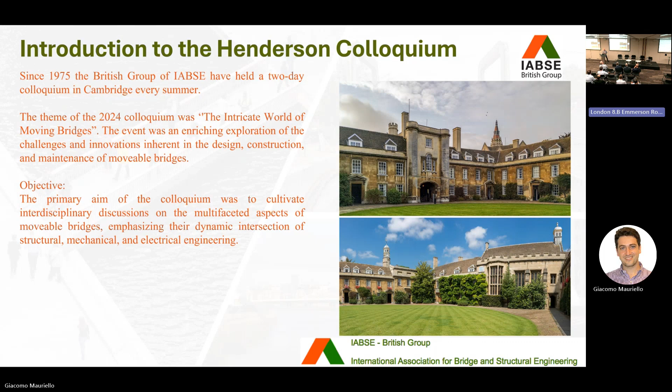So for those of you who don't know, and this actually was my first colloquium, they're held every year around the same time of the year. And they discuss the issues of the day in engineering. And we decided to look at this year the so-called intricate world of moving bridges. An exploration of the interdisciplinary nature, the very complex structures that involve design interdiscipline coordination, but also coordination with clients and usually with architects and certainly with constructors. So we wanted to cultivate this interdisciplinary discussion and look at a way to improve the practice in the United States and in the UK, and perhaps even potentially bringing it together.

And so, as I said, it's an interdisciplinary design world that we're in. So we wanted to look at those and break those down, the structural, mechanical, electrical coordination, and how to bring all of those disciplines together to get a coordinated structure. And as I said, temperature movements are important to understand, and Simon will be talking about that in detail as we go on through this presentation. Early contractor involvement and supplier involvement. A lot of the elements that go into these structures are off the shelf or have to be custom fabricated, and so getting that kind of advice from contractors is important. Of course, in the world that we're in today, sustainable practice needs to and ought to be accommodated within our designs, and we talked about that.

There was one presentation about the pros and cons of counterweighting a structure, right? The real heavy brute force perspective from a structural perspective, or non-counterweighted and moving that force into the machinery. There were attendees from the United States and from Britain and from Europe, all using different codes of practice. And there was a presentation on the comparison of those and juxtaposing those and looking at the pros and cons of those. We also need to talk about, skip to 7, the marine traffic and the involvement of the clients and the owners, the port authorities and the marine industry, and how to manage construction around the constraints.

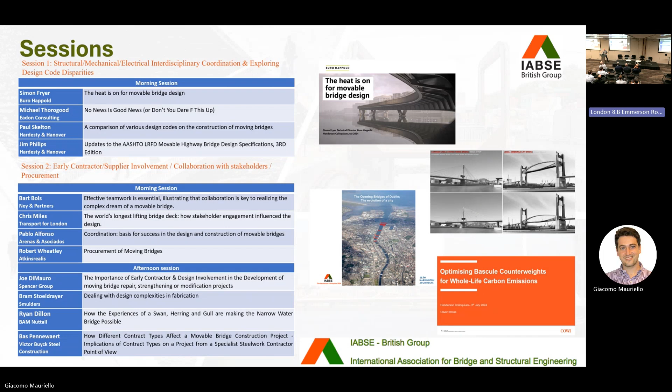And we'll talk a little bit later about how we can move that forward, taking those relationships and moving those forwards into an organized fashion to help further the practice. So there were 2 days worth of sessions. We arrived on a Monday night. There was a full day of sessions on Tuesday morning and afternoon, and then a morning session the next day on the Wednesday, and then a wrap-up session. And again, we'll have 3 of those sessions today with our attendees over here. I think that's more or less what I want to get to.

The panelists' assignment, as I said before, is talking about temperature. Ryan will talk about his experience working on the Northern Spire and the Great Yarmouth Third Crossing, or the so-called Herring Bridge, and the Gullwing Bridge, which maybe a lot of you know about, since Arup was involved in that, and the Govan Partick bridges, and how those bridges came together to inform what he's currently doing. Really extraordinary presentation that was made there. And Ezra will talk about it from the perspective of the architect. So I think that's it for me.

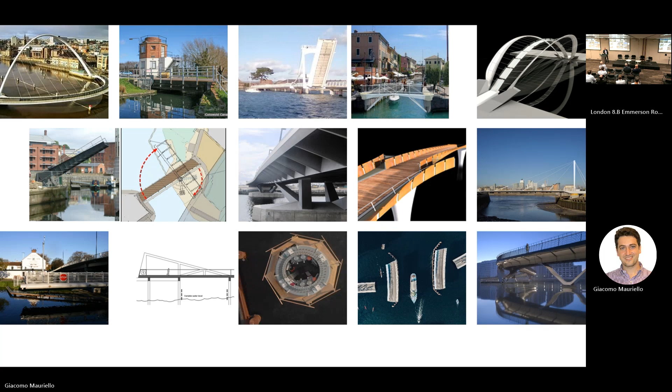So with that in mind, I want to explore the approach that is taken to these very unique designs. And I'm going to use the topic of temperature effects to illustrate that. But I'm not just confining my comments to that. It's just quite an important subject. And I think you'll see from the project examples that I give how we've needed to go a little bit beyond what the standards say in order to verify how these structures will work.

So I'll start by going into the temperature effects, illustrating that with reference to 2 case studies, projects that we've worked on, and then broaden out the discussion to designing from first principles and where perhaps the codes are not sufficient to give us all the tools that we need. And I'm hoping that at the end of the presentations, we can have a bit more of a discussion about this whole area.

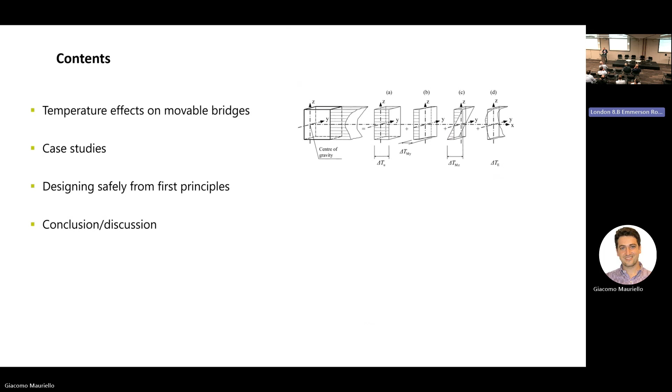So I don't think I need to labour too much on why temperature effects on movable bridges might be important. There's plenty of press coverage of problems that have occurred, stories of the fire brigade coming out to douse down a bridge that has jammed in position. It's very important that we try to predict the thermal effects on a movable bridge and make due allowance for that in its design.

However, when you look into the basis of the thermal sections of the codes of practice, the Eurocodes, going back before that, the British standards, you find that it's based on quite a narrow amount of research. Actually, the original rules were based on some research done by the TRRL, the two reports that fed into the British standards, and that seems to have been perpetuated ever since in subsequent codes. And so there's a bit of a lack of research data in order to predict the effects of temperature on bridge structures.

Now, with fixed bridges, that's obviously something that we would be interested in, but even more so with movable bridges, where we're not just trying to come up with a safe design, we're trying to predict how the structure is going to behave, and that's a little bit different. On the one hand, we want to make sure that joints are sized so that they won't jam, but equally, we don't want to be designing them so they're half a meter wide and they look awful. So we've got to try to get our predictions a bit more accurate.

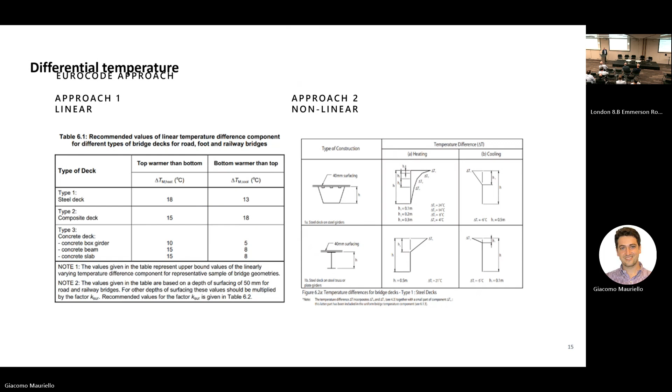So let's look at a couple of case studies. First bridge I want to consider is the Lille Langebro in Copenhagen. Some of you may know the structure. It's got a very complex geometry. Its main members are formed by doubly curved triangular box sections along each edge of the structure, which are exposed to the elements completely.

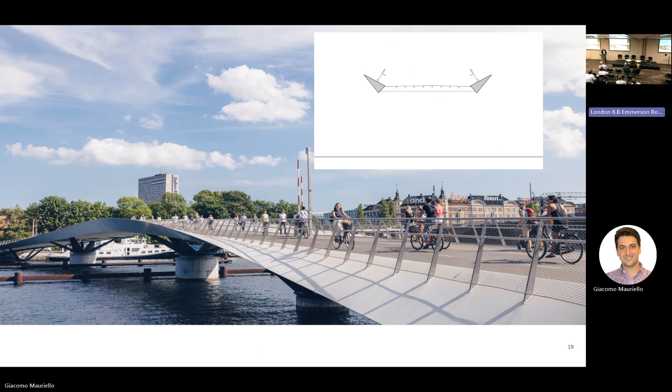This little animation shows the variation of the cross-section as you go from one end of the bridge to the other. And it's meant to replicate the flapping of the wings of a bird. Not only does it have that complication to its geometry, it also has plan curvature. So how do we predict the temperature effects on a bridge like this?

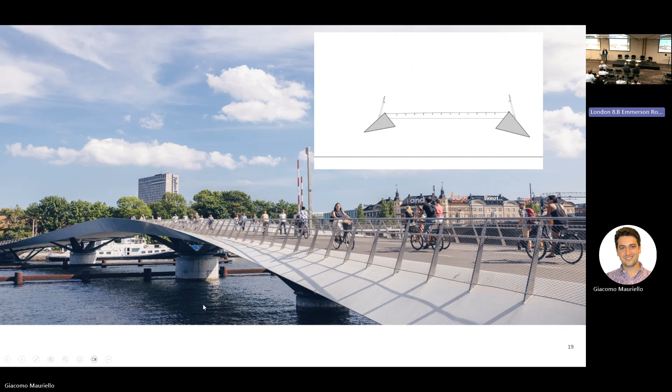How do we start a video?

Okay, this video is supposed to show how the bridge opens. The bridge is divided into four. The two central portions of the bridge rotate. One moves slightly before the other. And they come together with a joint which is obliquely cut across the bridge decks. So the point of showing this is just to emphasize the importance of accurately predicting the thermal effects on this structure.

Oh, there we go. All right, there we go. I'll know the next time. So there we go.

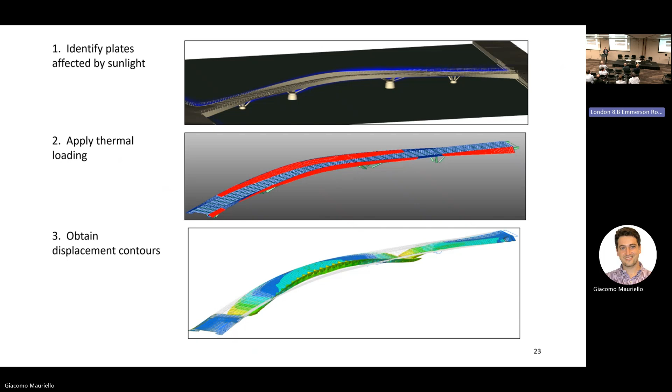And then we applied loading to the structure. I think it was a 12-degree temperature rise to plates that were affected by the sun at any given time. And you can see from the pattern of the sun loading that gave some very interesting effects on the structure. And this is the resultant movement ranges that were calculated at the joints.

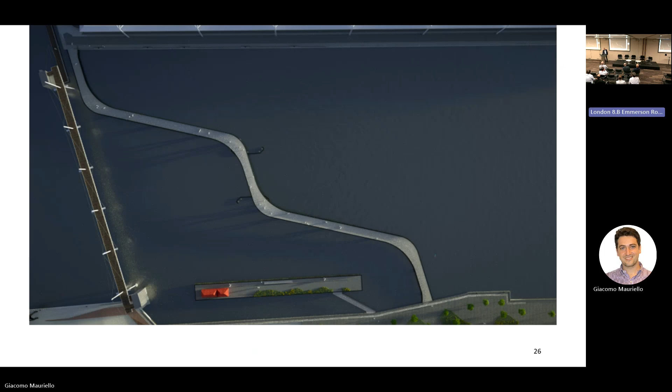So that bridge was constructed and has behaved well, but we now have another challenge. This is the Royal Victoria Dock Bridge at Silvertown, which again has a quite complicated geometry. It doesn't have the doubly curved twisted structural members, but it does have an interesting plan geometry. That's the nature of the structure itself. And this is how it opens.

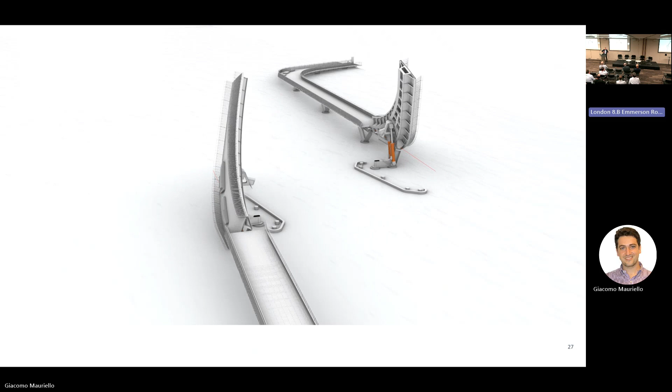So it's a double leaf bascule, but the two opening leaves are such that the outer radius is on opposite sides. So if you can imagine, the temperature effect tends to affect each of those leaves in the opposite direction, which gives some interesting concerns, potentially.

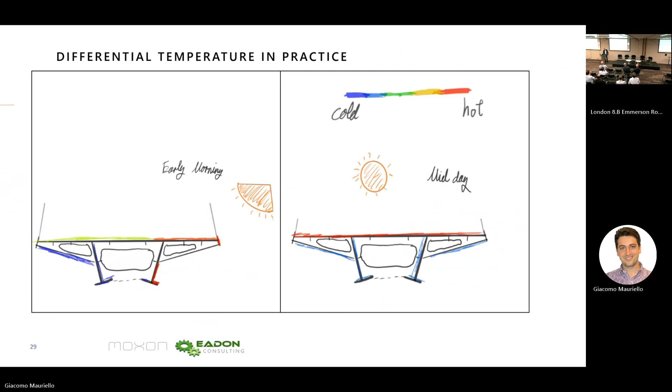So again, we wanted to be extra sure about the way that we predicted the thermal movements on this bridge. So we went one step beyond what we'd done with the Lille Langebro, and we used some clever software, some scripting, a plugin to Rhino called Ladybug, and weather data from the adjacent London City Airport.

And this time, rather than just applying a temperature rise to the plates affected by the sun, we actually looked at the irradiance that those plates experienced. And that can be related to the heat that they gain and therefore the temperature rise. And so it was a much more sophisticated bit of analysis; we were taking account of the time that each of the plates was heated.

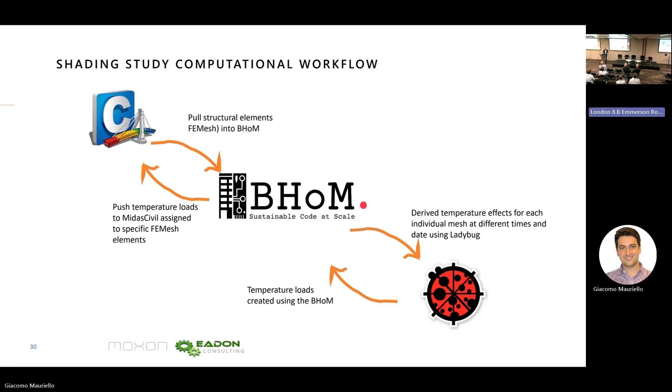So again, this bridge runs north-south, and so a similar sort of sun path to the other bridge. And you can see how that can be put into an analysis model, and we can get an envelope of all the movements. So it's a bit of a brute force way of doing it by computational power, basically, but it's a possibility that's open to us now, whereas it wouldn't have been in the past.

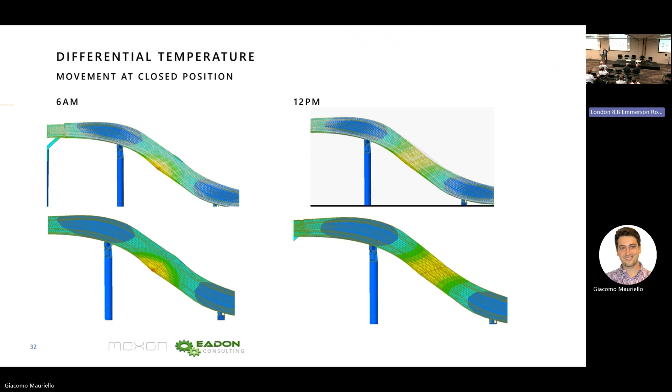And this is all in addition to doing the codified checks, by the way. So we don't ignore the code. We do the code checks as well, but this is an additional check, which we deem to be sensible. These are longitudinal movements at the joints that have been calculated.

When the opening leaves come together, there are pins that lock them. But if the bridge is just closed, then obviously there's a possibility for misalignment, and those pins need to be designed to cater for that misalignment. So that's another factor to be considered.

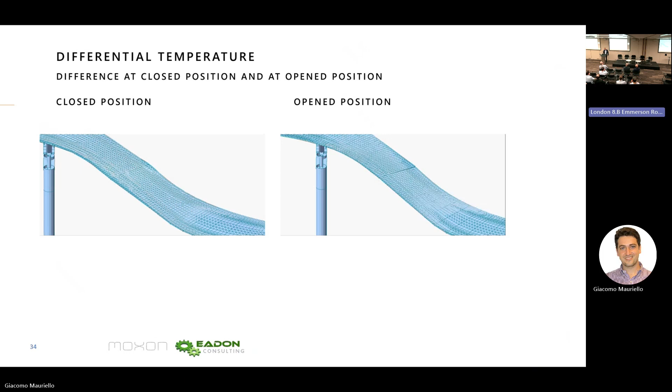Okay, so hopefully you can see the sort of thing that we've got into to try to think outside of just what's in the codes when we're designing these structures. So I've started with a blank sheet of paper here. And I'd like to just make the point that although the codes and standards are not there to be ignored, they only go so far. There isn't a standard which relates specifically to a lot of these structures. In fact, we know that the codes and standards which relate to movable bridges in general potentially need to be bolstered a bit.

So we now have this computational power, and personally, I'm not an expert in this at all, but we do have some very, very clever people who are able to write scripts, and we can just look at every conceivable possibility and envelope the whole lot, and then just gain the confidence that we've done that process, and we're not trying to second guess exactly how these structures are going to behave.

So I've given the example of temperature, but there could be other things that we might think about. I mean, maybe probabilistic design of loading patterns and so on could be something that we look into, and that might lead to savings in terms of material use.

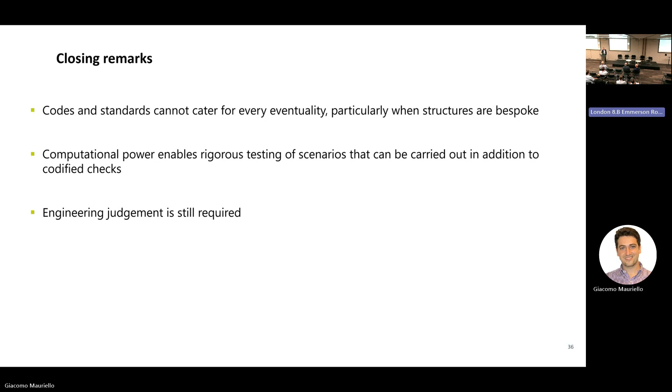And then the last point is actually, if you looked at the figures for what we designed for in terms of gaps on the Copenhagen Bridge, you will have seen that we didn't just work to 37.56 millimeters. We allow for construction tolerance, and there's always a need to be practical about these things and use some engineering judgment.

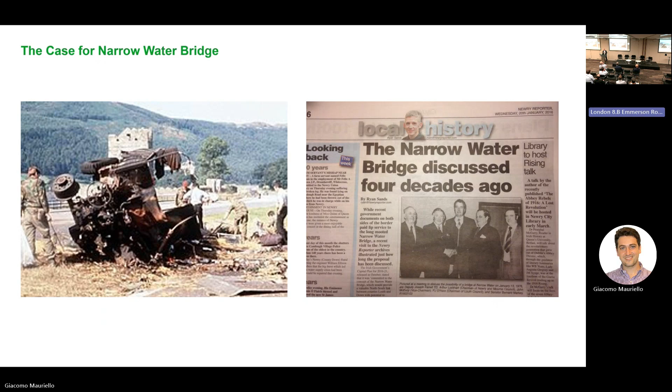It's also the site of the most significant loss of British soldiers' lives in the Troubles, where 18 were blown up, and this event stimulated discussion between civic leaders north and south of the border. We can do better. How can we come together? And 50 years later, and 25, well, maybe 30 now, after a peace process, and being a child of the peace process, it means a lot to be part of what Narrow Water's going to bring. So that's in the past.

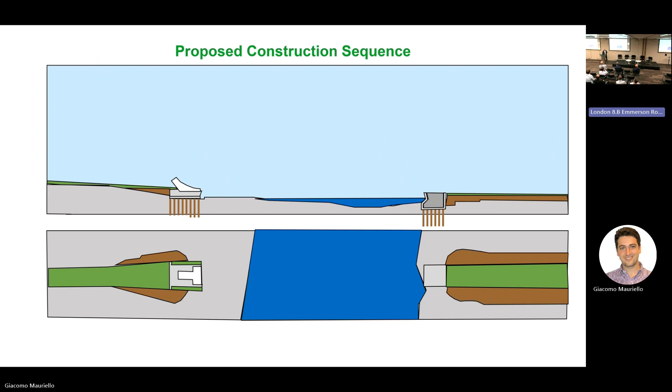Let's move on. Our proposed construction, as presented and consulted on, was what you would generally see: say, 200-ton sections prefabricated and spliced on site over temporary works, incrementally working out sequentially from our south abutment, and the same for the bascule span on the northern side.

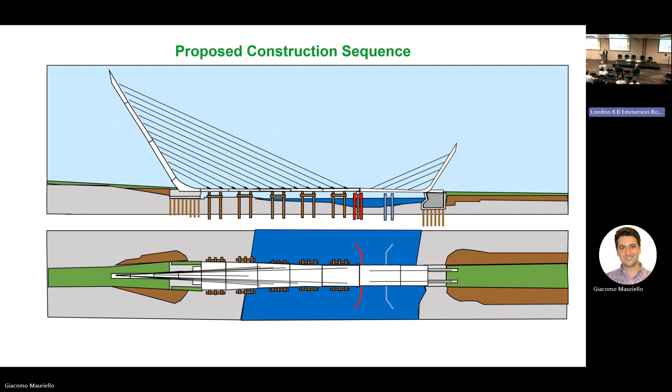Doable, but if we look at the past and the experiences of Mr. Calatrava, both in Seville and California, these structures are costly, they overrun, and they present quality issues, and they get done and they are beacons, but both of those schemes, while beautiful, overran on both budget and time, and the first thing we said is we're not doing that here. So in swims our swan.

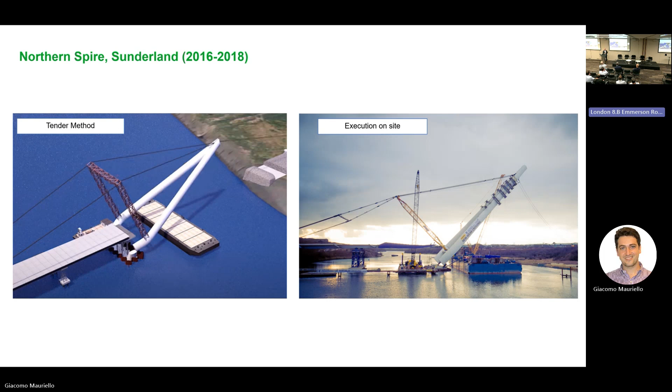Our swan in the story is the Northern Spire in Sunderland. A good friend Simon was involved in it. So I once thought I was a maritime engineer, and then I got a chance to build this, and I fell in love with bridges. And Simon and friends looked after the deck, but I looked after the pylons, so I'm going to talk about what crystallised it, not unlike Narrow Water. So Narrow Water was shelved 10 years ago because of budget constraints, and it was deemed not to be buildable. Northern Spire was the same, and it took a bit of clever engineering and interdisciplinary coordination to get that over the line.

And those are crystallised in the erection of our pylon, which was a 110-metre high, 1,600-ton composite structure, prefabricated in Belgium, one piece, floated across the English Channel, up a similarly tidally challenging watercourse, and erected on site, 100 metres off the shore.

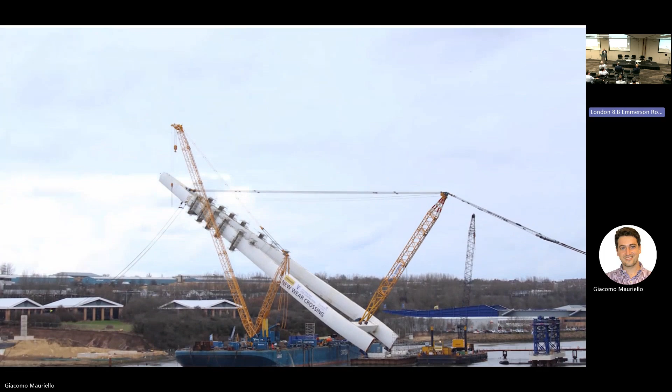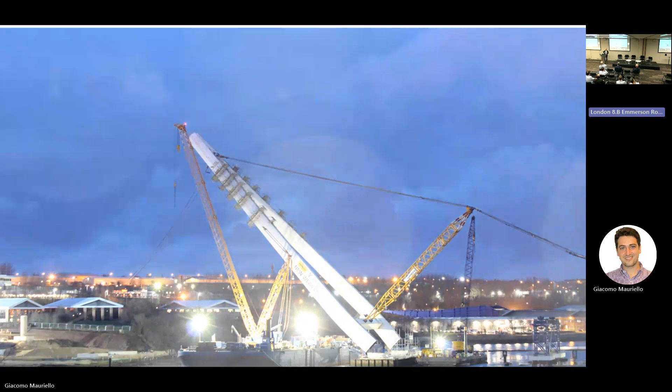While this isn't a moving structure, it was without doubt a challenging one, and it needed that interdisciplinary coordination between our architect, our consulting engineer, the main contracting team, which I was part of, and our specialist supply chain, being Sarens and Victor Buyck. And without that, it would not have been a success, but it was a resounding success, and what a job it has been.

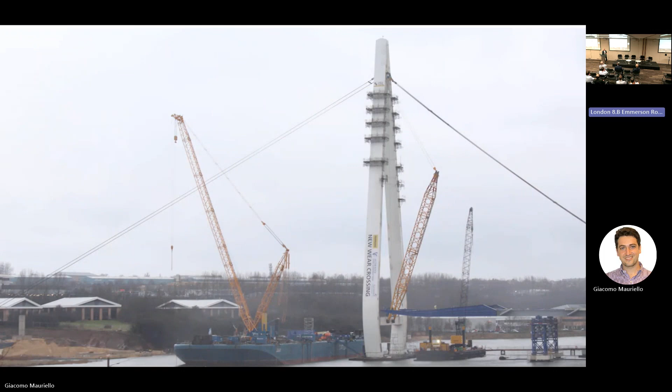But also, bridge building's a sort of closed industry, and the relationships you build tend to resurface again a few years later. And a lot of the key relationships formed in this project have now come together to make Narrow Water possible, albeit via different employers.

In swims our herring, the silver darling of the East Coast. The herring in this story is Great Yarmouth Third River Crossing, and I've used it a few times to dispel a few red herrings in the industry, particularly Mr.

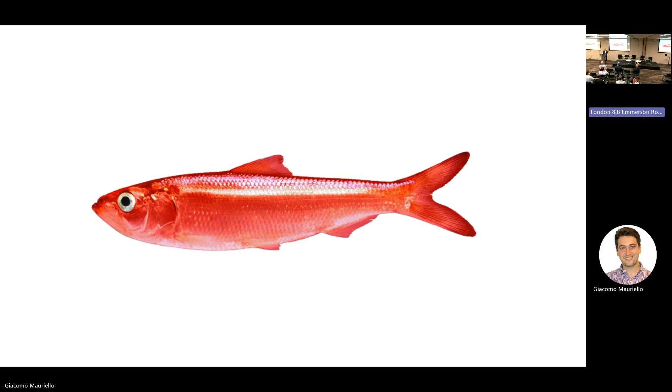Farmer and the Farmer report that we must modernise or die and do things deliberately differently. I think we're doing just okay. This is an example of how design and construction teams, innovation, collaboration, and integration alongside a well-aligned client team can form a sweet spot where the project goals are met, it's delivered on time, on budget, and it serves the community it's intended to.

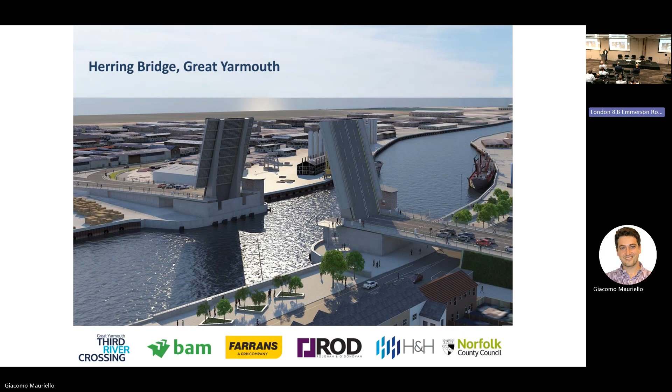So Herring Bridge in Great Yarmouth, we had a very well-informed client that knew what he wanted. He wanted a bridge that could open 15 times a day without fail, without giving challenges. So we were splitting the river port in half. And again, that similar environment that we had in Northern Spire came together again, this time on the JV. And again, brave concept, well executed. And this one obviously opened earlier on in the year to success, and it's operating well.

The key decision that informed Great Yarmouth was selection of bridge form. We were £7 million cheaper than our competition and 9 months quicker in programme. A lot of that's down to the bridge form we selected. So we had Hardesty and Hanover in one corner, bringing the moving bridge experience, ROD on the structural end, and a contracting team that wanted to wrestle their way through solving a problem.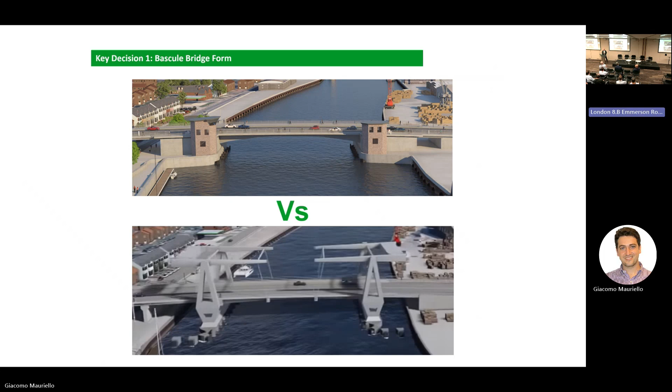The defining decision was to go with a below deck balanced counterweight structure with a very efficient mechanical system. That was made possible via piling through an existing quayside, which was dilapidated and fallen over. Our competition was scared of that and stayed away from it, and as a result, they had a huge counterweight, which pushed up their price.

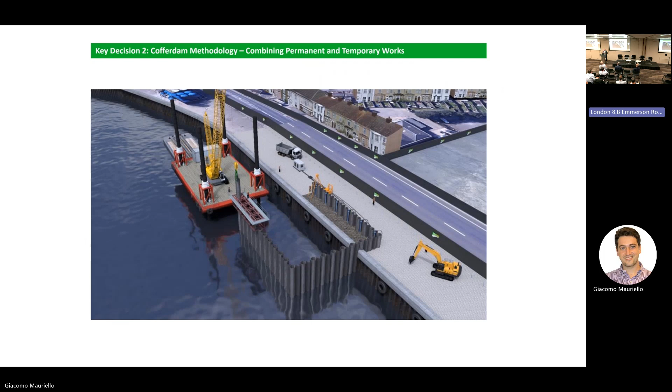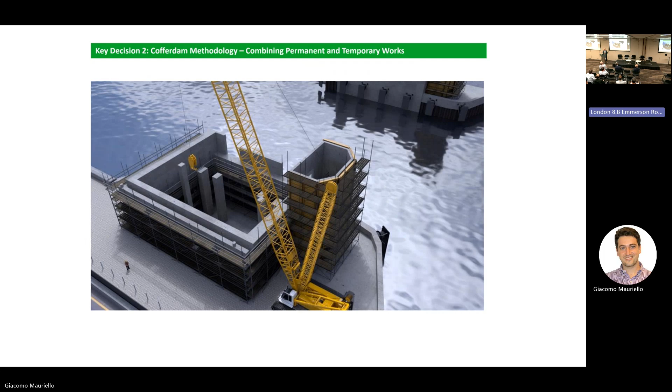We then took the decision to optimise or rationalise our temporary and permanent works by combining them and then using them in the permanent case. So once we put in our combi wall, we then used that in the permanent case, giving us a lovely, deep, wide bascule chamber, a lovely balanced counterweight and a nice, efficient operating system, which you'll see a nice animation of now from Paul and the gang at Hardesty and Hanover. And I had the pleasure of being there yesterday and took a few colleagues inside it, and it's nice to see it performing as well as it is.

Turn your phones off, folks.

So that's Great Yarmouth operating. And here's the noisy neighbour, and I'm conscious I'm in Arup's office here. So we're Gullwing in Lowestoft. So we're in a JV, and I was with my former employer Farrans at the time, sitting alongside our BAM colleagues that were currently doing an ECI contract for the Gullwing, or the Lake Lothing Third River Crossing, as it was called at that time.

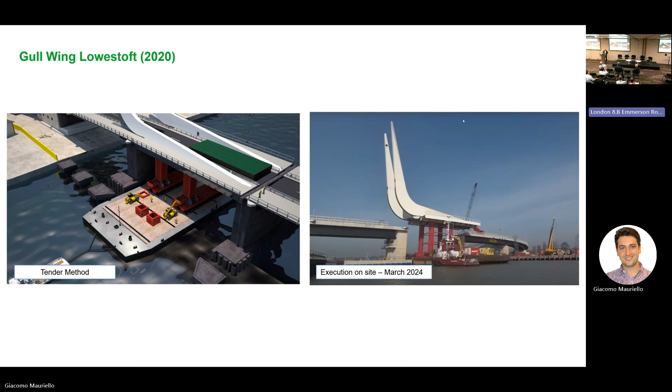Heard various noises of how things were going, and was impressed at the technical marvel that they were trying to embark on. And then got a phone call one day to come back into the office. It was back up in the market as a tender. And I was like, what? And was then told to go and try and price it from BAM's grasp. That we did for the same price as BAM.

And I know you guys designed this here and you've done a good job, but this is an example of how with a poorly aligned client and partner, the relationship can break down and ultimately end in a perfect storm, where you have a well-delivered, beautiful structure that moves and performs as it should, but it costs more, overran, and a lot of that. And Connor did a very good presentation that gave me the backstory to how this happened.

So if we look at the DCO approval in Great Yarmouth, Norfolk didn't go for DCO till they had our partner on board. So we got to rewrite the DCO to suit the methods that we needed, and changed piling methods and changed limits of deviation and everything. And that was written into the DCO. So then we had carte blanche to go and deliver that scheme. So starting 6 or 8 months after Lowestoft, we finished quite a bit in front of it and delivered on time, on budget.

Whereas Suffolk were dealing with politicians and budgets and press. And was it Mouchel at the time? No, it wasn't. WSP's predecessor. Pushed through the DCO and those applications. Then Arup and BAM had to jump through several hoops to try and build it within the limits of deviation and what the constraints were. And then they couldn't get agreement at the end of their ECI. And then it went back out to tender and spent 9 months competing again.

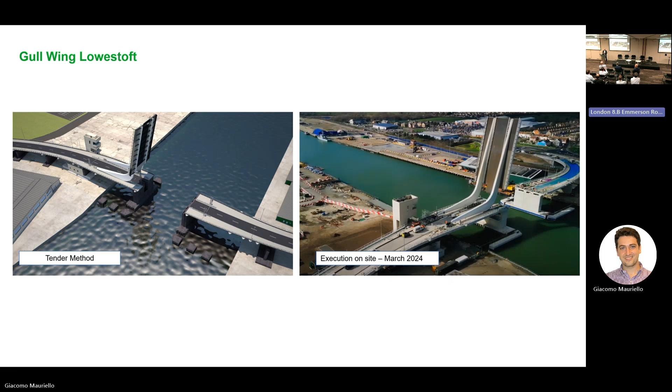Look, the scheme is built, well done, ARUP, but everybody's in a bit of pain. And the lack of route from a contracting team to your design team, which I'm sure you guys are answering queries on, it couldn't be two more contrasting schemes 30 minutes apart as an example of how important a well-aligned client, contract and consulting team should be to deliver structures of this complexity.

Then comes our tall ship, which is the Govan Partick Bridge, which had a very similar proposed construction sequence as what I showed in Narrow Water at the start. And we were brave enough at the time to say that's not what we're doing. The client doesn't know what they want yet. They want higher quality, shorter program, safer delivery with cost savings. And alongside Victor Buyck, that's just opened too, where we prefabricated the whole span off-site, lifted in with shear leg, and it's been a resounding success.

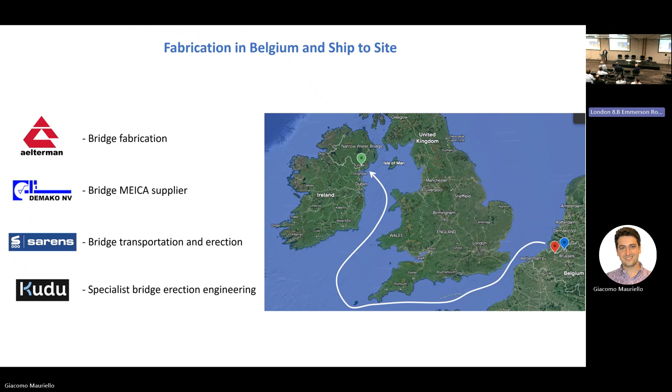What have all these stories got to do with our Narrow Water Bridge? Well, all those experiences and relationships learned, like Dad's Army, have come together to make it a possibility. A lot of the entities have changed, but the relationships have been the same people. Our bridge fabricator, Aelterman, who we used in Govan Partick, will be our moving partner. Sarens agreed to go exclusive with us, which took a hell of a bit of negotiation over in Belgium. And Kudu, our specialist temporary works erection engineers who worked on the pylon erection in Sunderland.

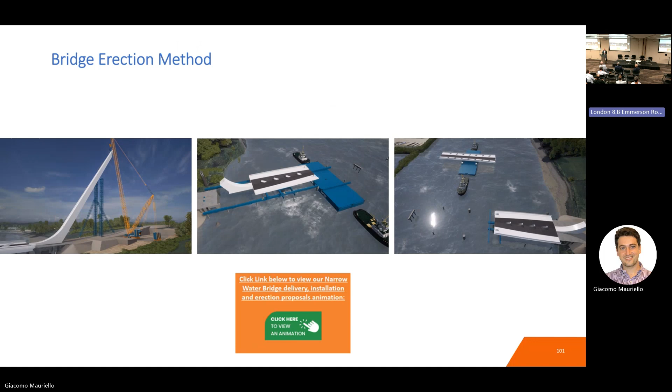We have been able to optimize our fixed span installation from 11 splices down to 2. And the bridge sections are ranging from a 97 metre long pylon at 870 tonne down to an 82 metre deck section at 600 tonne. Our bascule span, we're going to try to prefabricate the whole thing in one piece in Belgium, machine it and position it in final support conditions, and transport it as an 1800 tonne, 70 metre long bridge section with 40 metre high pylons, and install it in one piece.

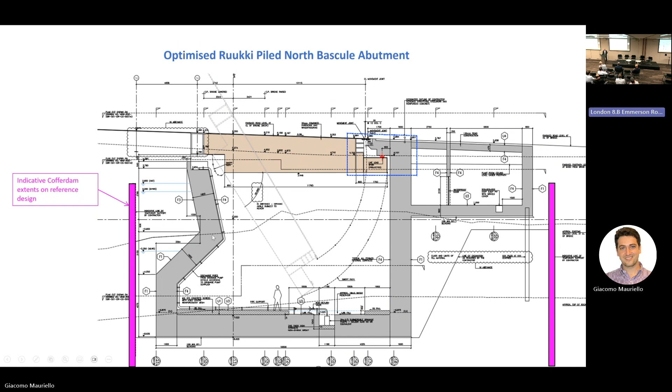The lessons learned in Great Yarmouth allowed us to be a bit cheeky through our tender proposals and say to our client that we like what you're doing there, but we think we can do a little bit better. And you can see here, in particular, the front wall and the lower clevis, and the incorporation, like Great Yarmouth, between the temporary and permanent works.

Now, like Simon mentioned, none of these schemes is the same, and the ground conditions are completely different in Narrow Water. You have the mountains everywhere. You have very hard limestone at 100 MPa within 5 metres, where Great Yarmouth you had 25 metres of Norwich crag and high basal heave issues. So completely different piling methodology, but the same approach.

That has allowed us then to also pull in our lower clevis, and we also said, well, why don't we stick a roof on top of that counterweight? There were large tail locks at the back, and that removed a lot of the live load off that back span, which makes a more durable structure, which also doesn't empty its guts into the bascule chamber every time it opens.

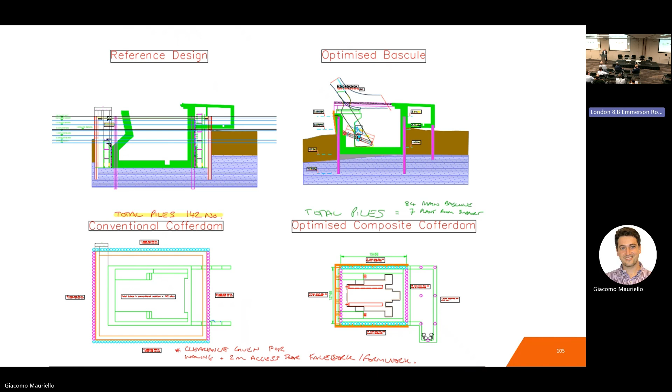The saving alone on the piled cofferdam is 52 piles, and our competition, I think, had 6 walings to get down to minus 12. We've got 1 waling at minus 1.5. And again, that's because we went with a secant pile method, full of concrete, nice stiff pile wall, where they were going with sheets and multiple frames you have to work through.

We've saved in carbon. We've optimized the complex front wall geometry. We're incorporating temporary and permanent works, so you're spending that carbon once, and cost. Program savings, and ultimately that was a massive structure which was ground bearing originally, and now we've got a ring of steel and rock sockets. We have now stiffened up that structure, and we're currently working through detailed design, Paul, on the knock-on effects in terms of the bascule.

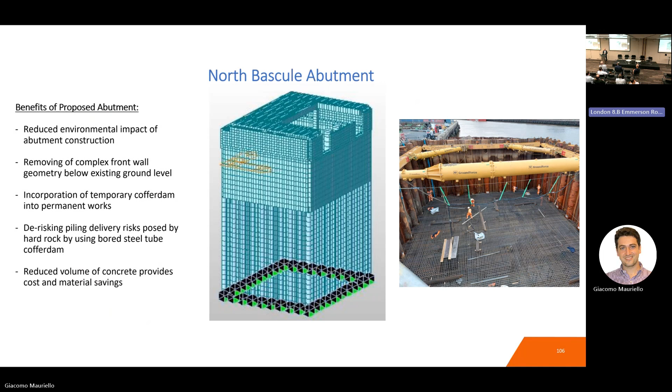This is our tender model of it opening. So as you can see, complex front wall, tail locks, which are holding up that back span, which was taking those traffic loads originally. So it came back after we won the job to pull that thread, and I think it's been beneficial for all parties, and we're still reaping those rewards at the minute, but with a few challenges to get over yet.

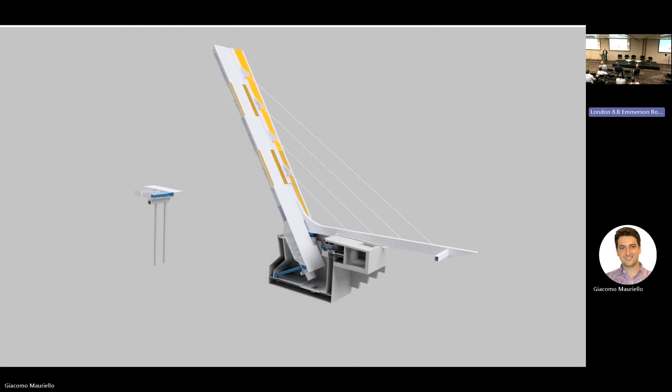What made that possible? That interdisciplinary coordination and the respect of each other. We had a very tight team who worked with each other previously, and we have the capabilities to machine a J-beam on a 1800 ton bridge in situ on site. And if we didn't have that capability, we wouldn't be able to do it that way.

And again, that's being respectful of the team around you, getting the right people around you, and investing in the project and getting the end goal. And there's wins and losses along the way, but ultimately we all seem to be winning at the minute. Without further ado, this is where we've got to.

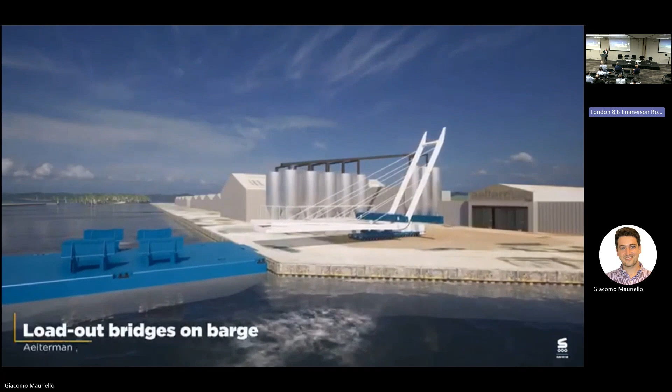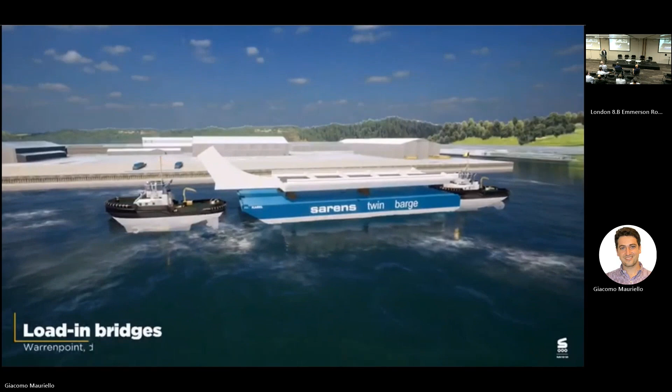This was our quality submission, if you like, and this has been sped up 3 times, so it looks like we're madmen driving too fast, but lovely piece of music for it, but it's 10 minutes long, so I can't afford it at the minute.

This is our deck section 1. Having won the job, we actually opened the book again and said, let's have one more bite of the cherry here. Can we make this better? So what you can see here now is deck 1, which was originally 870 ton with the boot and the stem of the pylon connected.

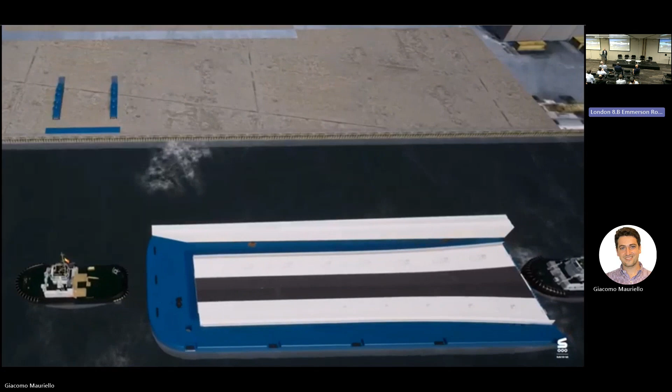There was a reason for us going that way originally, but having had issues completing the welds on Sunderland with a 90-meter pylon in the air blowing in the wind, we have since decided to move that location, and I'll show you in a minute where that's at. Right, deck section 1, deck section 2.

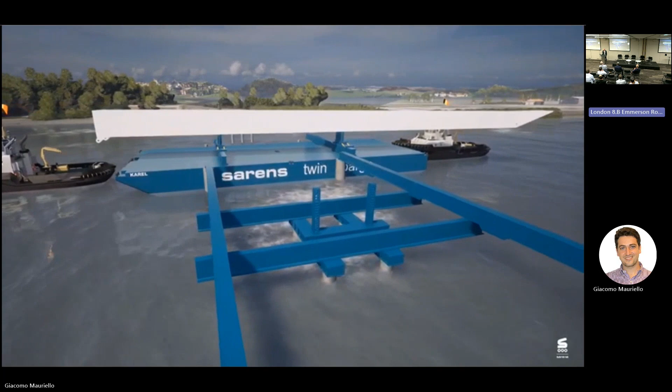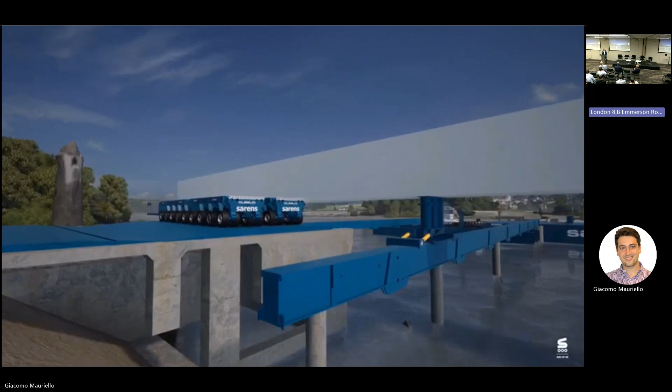As I said, it's about 800 meters upstream from a deep river port, but we've 0 water at low water, and we've loads of water at high water, and we couldn't do a temporary dredge. So in Sunderland, we were allowed to do a temporary dredge, so we could sit there for 3 weeks with a pylon floating on the barge, ballasted. We couldn't do that here, so we did a drone survey and a bathy survey and aligned them as part of the tender to de-risk this transportation method.

We've also tweaked our pylon delivery in that we're going to rotate that in the barge and slide it in, because the rotation on the barge has a significant cut, which was possible, but probably more disruption than we needed.

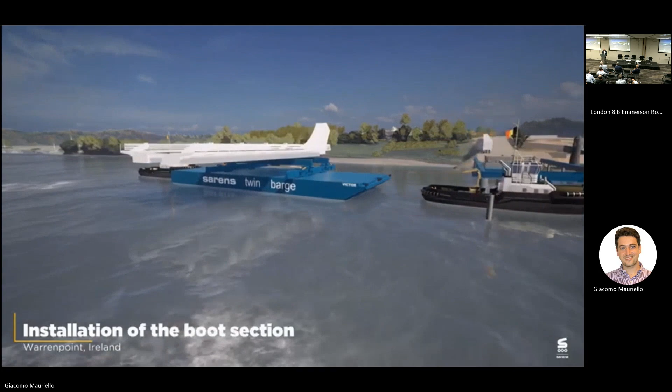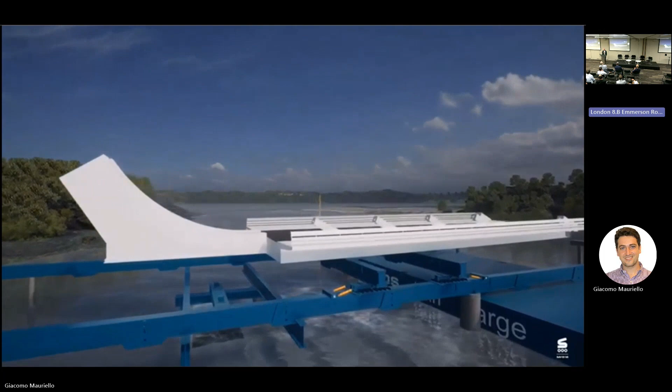Deck section 1 then comes in, and our temporary skid track again was reliant on Sarens' expertise and their inventory. So we have the guts of £7 million of temporary works for this, but a lot of that is stuff that is on the market from Sarens, and pushing the boundaries of what they can do, it's fair to say, but getting the right people in the room and challenging what we can and cannot do is the essence of delivering these schemes.

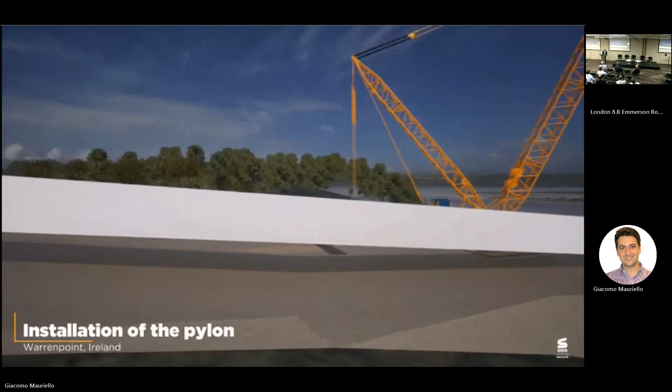As I say, 1 deck splice, so 1 tent, 1 bit of blasting, welding, painting. Finish is applied before we come. Our pylon erection, with a lot of debate over how we do this. You can see there's a hinge. The hinge allows us to use half the size of crane that we need to do the lift by itself.

That's a 100-meter stick, and we have since moved this hinge down onto the bottom of the abutment so that this pylon can come in one piece. That has moved that splice from an 80mm plate down to a 30mm plate, which is PT'd onto the base, so it's not going to be vibrating the whole time and cracking your weld as you try and complete it.

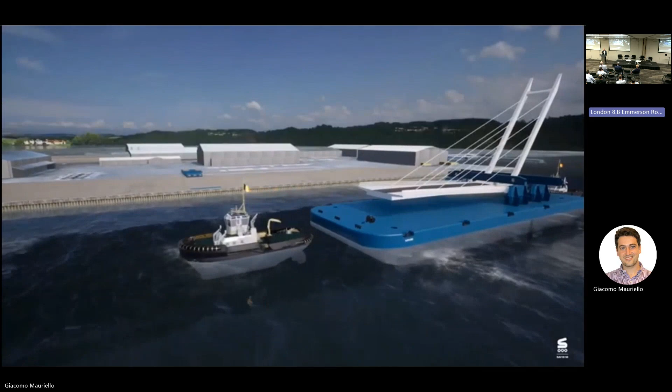Our temporary tower, we have changed the form of that and again found betterment. And a lot of that's down to the legacy of keeping the people involved in the tender and the delivery. So then decisions that you can stand over and challenge, you're not getting defensive with your old decisions.

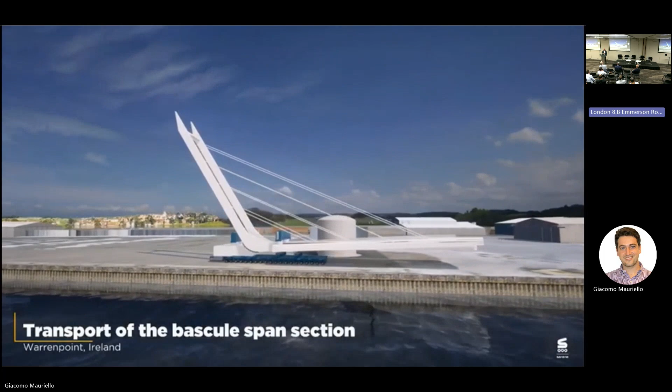It's a 30-mile-an-hour road. I don't know if we're going to get caught or not with speed cameras, but again, that's been fully laser scanned and clash detected. There are numerous streetlights to take down, but it's only streetlights.

And drop it down on temporary supports, move the SPMTs to the outside, drive it over the abutment and drop it onto the flat track. So we'll get down to within 50 mil of that, then use a balanced jack system to slow that down onto the track and tread and hopefully not do any damage, Paul.

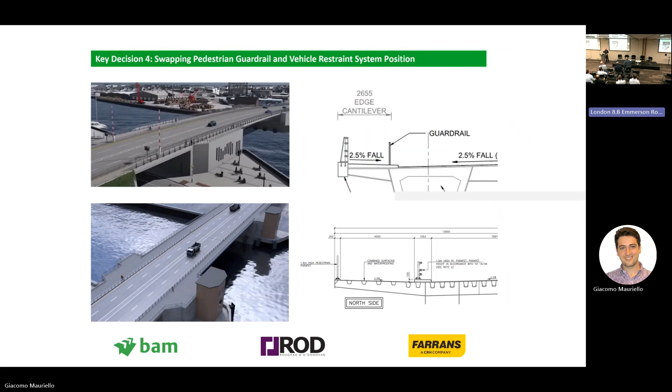Slides there. Used to have questions. All right, let me just. Does anyone know how to see notes? No, Ezra, you. See, no, so I don't think so. Sorry, Ezra. I'm going to freestyle it then. Yeah. Okay, cool. It's my bad. No, Ezra. No, that's cool.

Yeah, so thanks for having me. I'm Ezra Groskin from Moxon Architects. It was a really great honor to be invited to the Henderson Colloquium and then again to come here tonight. And it was just such good company there to be surrounded by people who all love moving bridges. And I was really proud to have worked with so many of them in the past and working with them currently and in the future. And it was also nice, there were 4 of us architects there, so we were well represented.

So this talk is really just a bit of an overview of some different work that I've done and that my practice has done, talking about the role of the architect, design team collaboration, not really going into client and contractor collaboration as well, and just highlighting some various themes and hopefully showing you some nice designs too. So I think as a starting point, it's like, what can an architect bring to this world of moving bridges? It's a highly technical field. As Simon highlighted, some of the technical aspects of it don't even apply to static bridges.

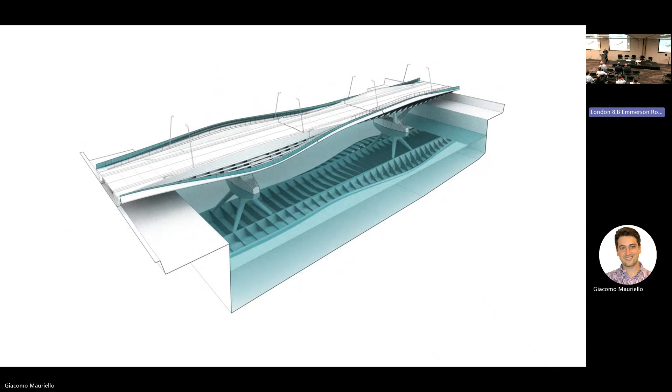The bridge is a pair of balanced cantilevers. It's one of those structures where the form of the structure demonstrates how it's behaving structurally. So you have a lot of depth over the supports, and it tapers out in the middle. And then for the architects, the games we were looking at were how do you really emphasize that, make the most of that structural behavior. So for us, it was playing with these generous footpaths along the side. So it's quite satisfying and works quite well. And then added on top of that, there's this layer that the central bit is removable, which then you're like, oh, okay, then that structure really starts to make sense.

So these balanced cantilevers have this bit in the middle that can lift out. It's a lift-out section. Technically it's a movable bridge, but I think it's been lifted out once, and it's probably over 10 years old by now. So it doesn't happen often, but it can happen. And because of this, we convinced the client that we could do it purely based on tidal power and ballast.

So it's a barge with trestles, comes in at the right time of day, at the right tide, and it's just the power of the tide that lifts it up, and then it can move it away. So I learned a lot on this project from working closely with Simon and his team.

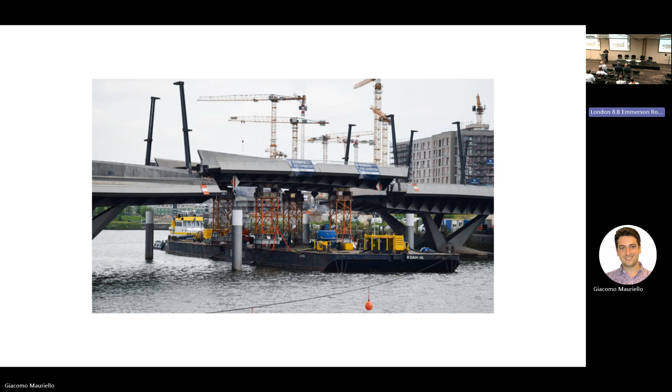But one of the things that is quite cool is the way the lift out span is keystone shaped, which means when it's dropping into position, it naturally guides itself to where it wants to be. But then the other thing that's quite cool is as it lifts up, it very quickly clears itself from jamming on the other bit. So lessons like that were really exciting to learn from Simon and his team.

So I think the takeaway from that is design should solve more problems than it creates. And that's something that I'm always asking myself and people in the office. You don't do something just because you can do it. Do it for a good reason and see how many problems you can solve at the same time.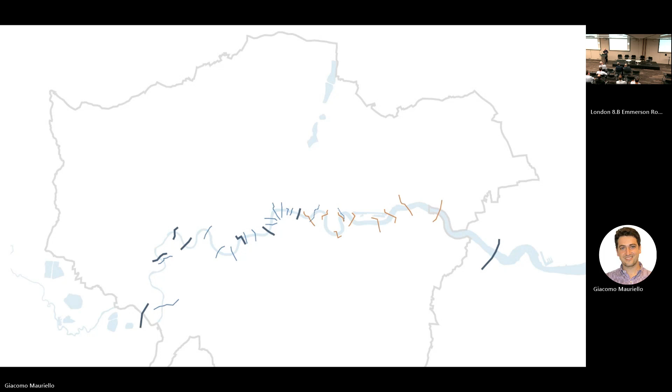And it seems like every 5 or 10 years, people get excited about the idea of a new crossing in East London, and everyone puts all their hope into it. And they think, could this really solve a lot of problems? And then for whatever reason, it doesn't happen. We're all a little bit disappointed. And I think maybe at times we're putting too much emphasis on a single bridge, and maybe there's a dream that someday it's a series of bridges working together as a system.

So looking at cities like Chicago, where you have lots of opening bridges and they're all controlled, and you could have smart signage that tells people which bridge is open at which time, and it wouldn't create as much disruption. So this was just looking at that. I think the other thing is the idea of, rather than big openings, small openings, but really controlling how boats move through them.

Architects like to talk about competitions. Some of them see them as a waste of time. I think we're quite positive about competitions. I think it's always a good opportunity to develop design, but also develop relationships with other like-minded people that you want to work with.

With open competitions, I'm finding that sometimes as more experienced competitors, we can at times handicap ourselves and almost overthink the problem. So it's a good thing to stay involved with. We're currently working on a couple of them, and you always learn something, and you kind of have to go into it with that mindset.

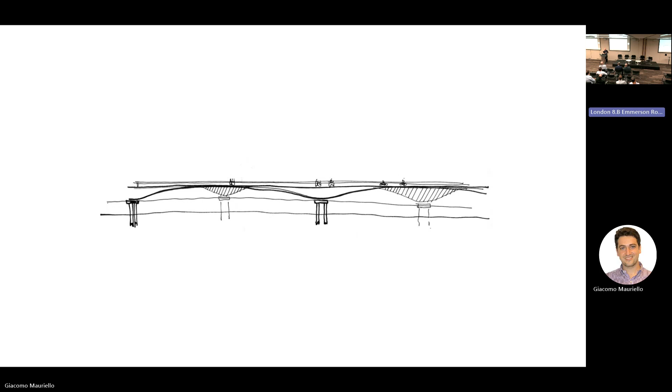So this was a little competition we did ages ago. I think a really basic bridge did get built here, but it was this concept of a bridge that looks like it's spanning further than it actually is, just through some play with form. But then also looking at how you could conceal an opening mechanism within the form itself, so space for rams and a way that it would support itself in the closed position.

Then I moved on to talking about this design collaboration, and I compared it to dance, and the collaboration that we're used to is between engineer and architect. Oftentimes when it's good, it's really good, and when it's not so good, it's like you're stepping on your dance partner's feet, and you can't wait for the music to be over.

But in moving bridges, you bring in a third partner, which is this mechanical engineer. And I've been lucky to work with Mike on a lot of these projects, and there's other mechanical engineers that we want to be working with as well. But once you get that kind of triangle of collaboration, things can get quite exciting.

This is the Royal Victoria Dock, which Simon's already presented, but I just wanted to go through. It's quite a peculiar and distinct design, and a little bit more about how we got there. And the way we got there is by the three of us from day one working on Simon's blank sheet of paper and really figuring it out, all at bid stage or tender stage.

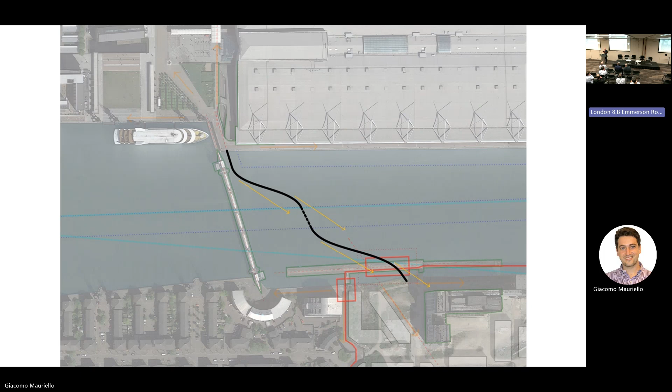And then we started getting to these ones where you're crossing more perpendicular, you're doing some wiggling. This one is kind of the compromise where you're crossing nearly perpendicular, you're wiggling, but not that much. And we did the math, and it doesn't actually add that much length to the design. So that's the form, and that's some of the reasoning behind it.

And then when you combine the way it opens is when it starts to get really interesting. Simon's already shown it, but it's using a tried and tested bascule, all of the normal components you would want to use, the same types of pivots, but just by orienting the axis along the approach and then having the opening span curve, you get this really dynamic effect when it opens.

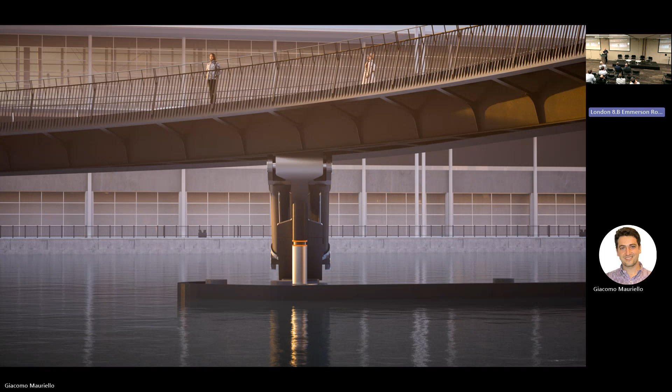The other thing is this three-way collaboration. We're all kind of equally obsessed with the details and the machine nature of these components. And this one bit where our disciplines all come together, where the design all comes together, is quite a fun part of the project. It's something that we spent a lot of time working on and refining and sharing models. And yeah, it's quite a satisfying part of the project that will be great one day.

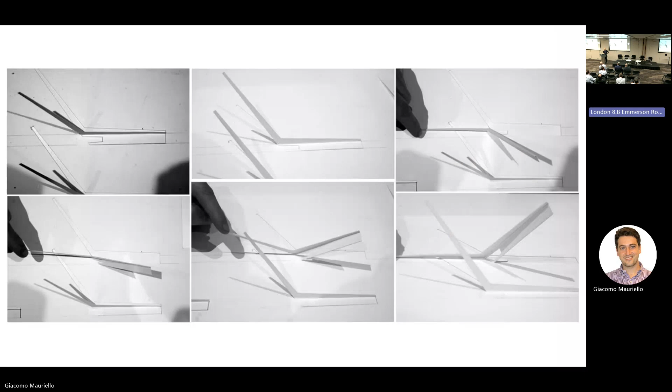So there's just some more images. Going back to competitions, this is just rough sketching these ideas. And this was before Royal Victoria Dock, but it was looking at moving pivots so they're not how you expect them, and how that affects the geometry when it's opening and closing. Getting a bit of excitement and a bit of playing with geometry.

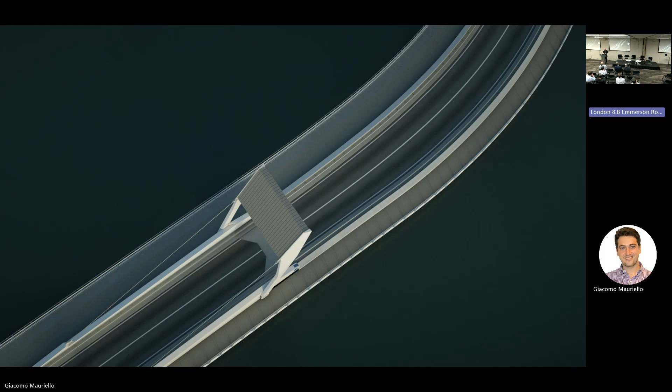And that leads to the final bridge I'm going to talk about, which is the Spar Bridge in Dublin. Moving bridge. At the colloquium, this was quite good because there were other projects talking about this stretch of water where you've got a lot of opening bridges and a lot of future opening bridges. So this is one of a series of bridges that are all being proposed for the eastern end, the furthest end of the river where it opens up on to the open water.

It's right in the port. It's connecting two halves of the port. You've got a lot of port traffic. And the idea of this bridge is taking that port traffic off the road network and giving it its own designated bridge. It's also providing cyclist and pedestrian links for workers within the port, but also for the wider area. So the client here came to the table asking for a gateway. They wanted something that could open frequently, but also had a presence within their setup. It's a gateway for river traffic, but also a gateway for their trucks and cars going across it.

We are quite constrained. The vertical alignment of the road meant we didn't have a lot of space to play with between the highest tides and the roadway. There's a bridge right next to it, which is another bascule where the counterweight goes down into a chamber. We looked at that and it was a little bit challenging. So we've come up with a slightly unusual situation where we're looking at Dutch bascules and other types of bascule bridges, and just starting to play around with pivot points, which is something, with Mike's guidance, we get really into: understanding the efficiency of these structures.

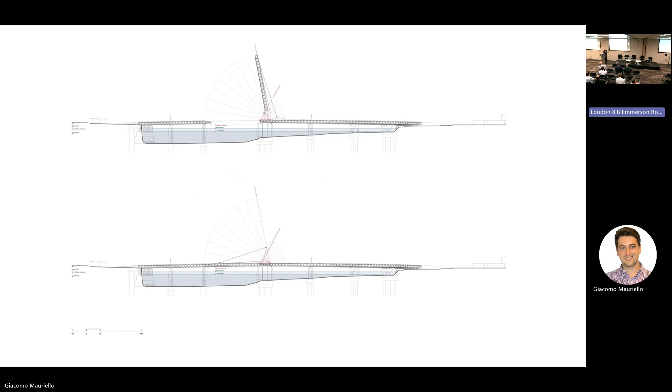But we came up with this idea that if you could separate out the pivot point of the opening span and the counterweight, you could position the counterweight such that it's at a more effective angle at the beginning of the lift. And you could also take advantage of this pier. We were given a width of pier that matched the other bridge. So pushing the two pivots to either side of that gave us a more efficient structure, but also a much more interesting opening sequence.

The other thing, and Paul mentioned this, the colleague at COWI who we're working with on this, we did a big study into the energy put into the counterweight versus the energy required just to lift this bridge. And if you're optimistic that energy's becoming more and more green in the future, it was actually a really tight comparison between scrapping the counterweight completely, just pushing it with pure muscle, and over time you'd actually spend less carbon on the energy than you would invest in this counterweight.

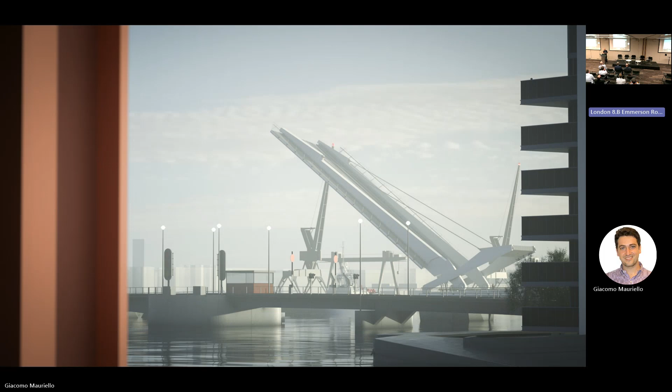The client really wanted a counterweight. They wanted something up in the air, so we've gone in that direction. And the other thing we're pushing is that's assuming your counterweight is steel or concrete. But if the counterweight could be a low carbon material such as natural stone, I think that also helps the case for a counterweight. That was a really interesting bit of work, which hopefully is going to be developed more in the future.

The other thing that the client and the design team were pushing from the very beginning is how this bridge, again an object within an urban environment, relates to the other hardworking dock infrastructure in the area. So it's clearly similar in the way it's formed. And it also is one of a series of opening bridges, a series of really quite important bridges along the river, and the role it will play in that.

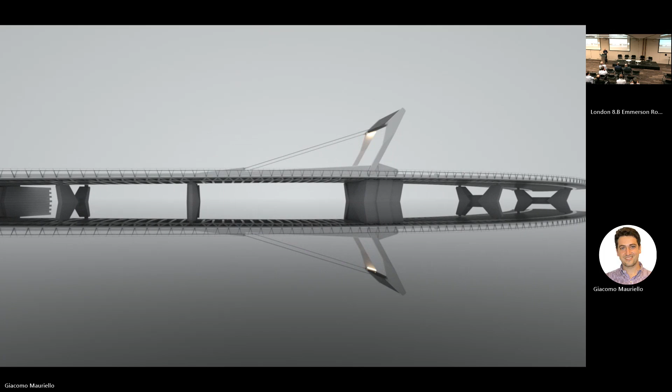Hopefully, yeah, so these are just some animations that give you this idea. It's much easier to understand when you see it moving, but you can see this idea of the two pins and the counterweight. It's quite nice to use, we're using these models, as all of us in this room are probably doing, but you're using these as design tools, not just as a presentation at the end of the day, but to help you get your head around this complex geometry and interfaces.

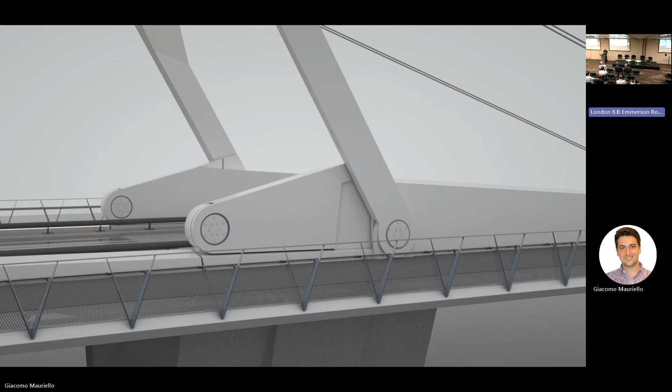There's a really lovely bit that I quite like, which is right here, which is this passive lock. It's using the geometry to create this lock so that if the cables were to fail, it would naturally stop itself from slamming down and crushing a car. But as soon as it starts to move, the lock just passively moves out of the way, so it's not preventing movement. So it's just this idea of making the most out of geometry and design.

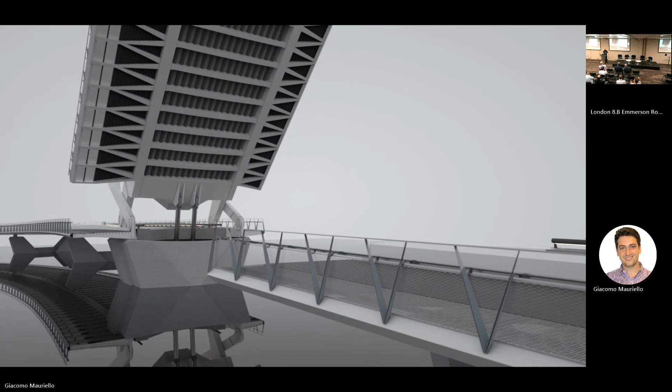There's one more, and these are sped up. So I think that's it for me.

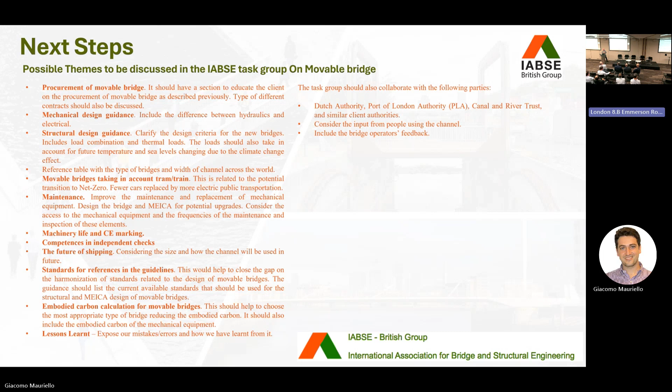So at this point, I think what we want to try to do is open up to any questions that anybody might have had in the room to any of the presenters, and then maybe open up to a more general discussion about how we can move forward within the framework of improving practice. Unfortunately, we're running out of time, so it has to be a relatively quick question and answer session.

But if the panel want to come up to the front, I'll give microphones out, and then we can perhaps request any questions. Come on. Right. Okay. Does anyone have any questions for the panel or for Paul?

Yes. So, interesting one about the temperatures. I presume you did a lot of correlation with the codified methodology versus what I class black box methodology, where we're now relying more and more on coding and clever analysis techniques. So, for my understanding, there's more that could go wrong with that reliance. So really, we do need to try to come up with some sort of codified methodology that gives you the robustness as well. Engineering judgment. I like that statement at the bottom end. So how did you feel with the correlation?